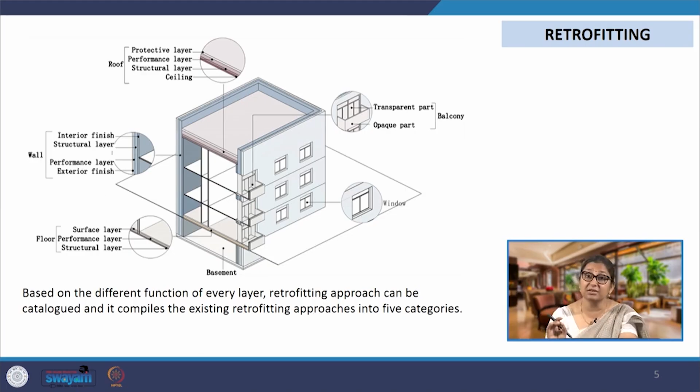Plus we have the MEP - mechanical, electrical and plumbing systems - where a lot of retrofitting measures go. Now, based on the spatial requirement, the services requirement, and the functional requirement, different approaches can be taken. There are 5 different approaches that we would normally see when going ahead with retrofitting.

The first approach is to replace a certain part of the envelope. So we could be replacing an entire wall if it's not performing well or has crumbled for structural reasons or whatever. So we could be replacing an entire building element. That is the first approach, which is replace.

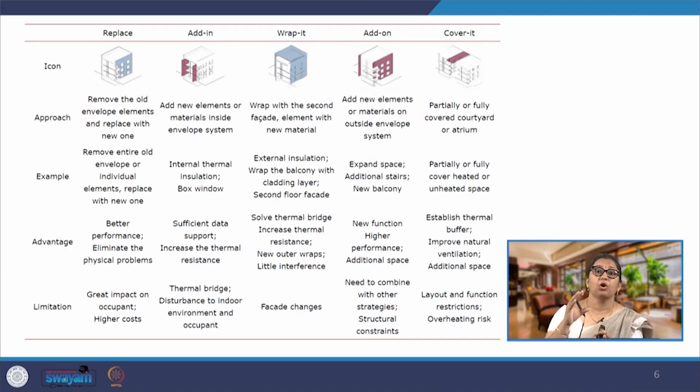All 5 approaches could be used in the same building for retrofitting. It's not that if we've used replacement as a strategy, we cannot also use add-ins, wrap it, add on, or cover it. We can use all 5 of them together on different building components. So this is the first one, which is replace.

The second one is add-in. Here we add new elements or materials inside the envelope system. So the envelope already exists, and we add the new elements and materials inside it.

When we say wrap it, which is the third strategy, we wrap it with a second facade. So the existing building is there, and on top of that we create another facade layer and wrap the entire building in this second layer, which is wrapping.

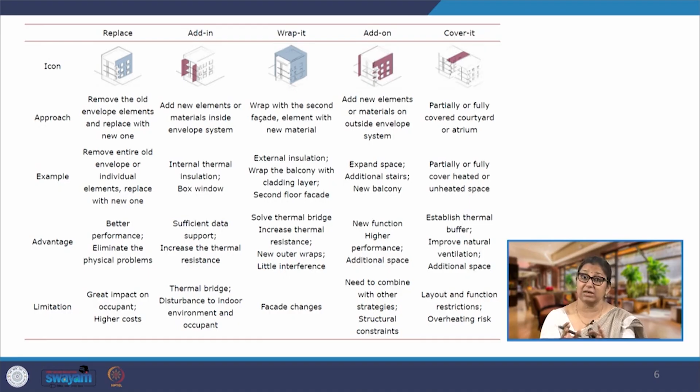The fourth one is add on. We add new elements or materials on the outside of the envelope system. So the envelope existed, and then we add to the same envelope an additional layer, the element or material, but we are not covering all of it. We are not wrapping the entire building, but we are only adding some elements on certain facades or certain building components.

And then cover it, where we partially or fully cover the earlier open or semi-open parts of it. So maybe we are covering the balcony, we are covering the courtyard. So this will be as part of cover it.

Now, all of these strategies, as I said, could be used simultaneously within the same building, but on different components.

Now, looking at an example of each one of these, when we are talking about the replacement of a building element, of the envelope element. So what we could be doing is, for example, there was a brick wall, but now we want to construct some load on it or an extra story on it. So we could be replacing this brick wall with a shear wall, or we could be replacing an entire wall with a glass facade.

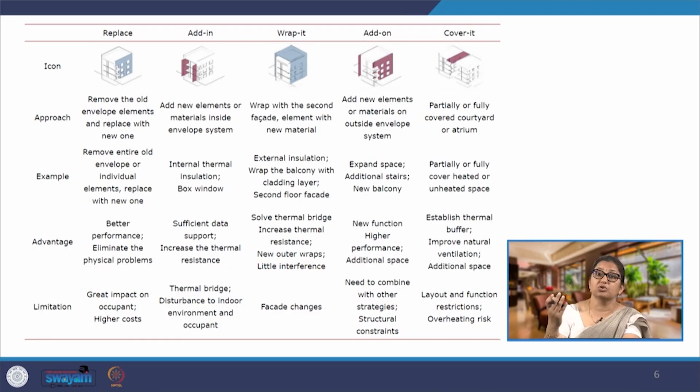Suppose the use of this space is changing, and we are converting an office building into a restaurant or a party hall, a banquet hall. There we might want more of a glazed facade for people to see from outside to inside and vice versa. So we are replacing an entire component - that is replacement.

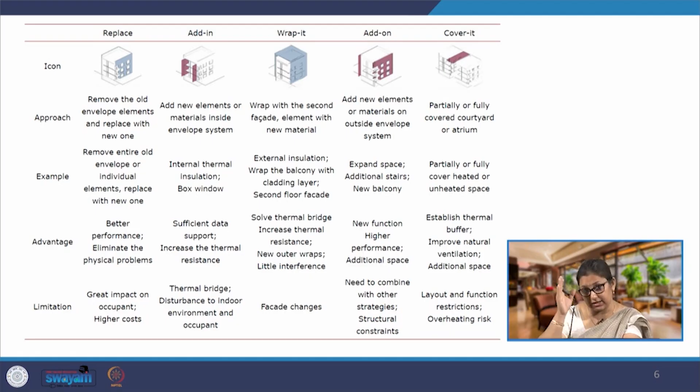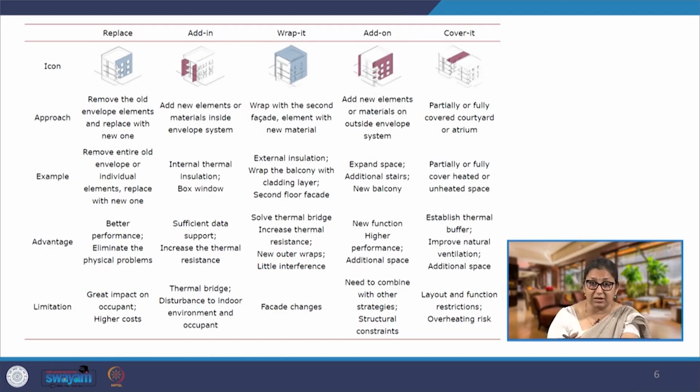Now, add-ins: for example, we can add thermal insulation inside, so this will be an example of add-in. If we are adding the insulation on the outside and an entire layer is being added, that will go in add on. So we are adding on top of it, or we may be adding a complete insulation plus the top layer, the protective layer or the aesthetic layer, the metal cladding. So this will all go as part of add on.

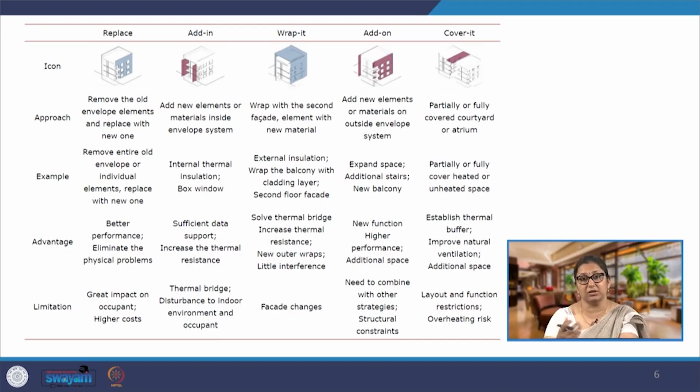When we say wrap it, it could be external insulation, but with the entire building being covered using it, or it could just be, say, a metal sheet which is cut using CNC into beautiful patterns, creating an additional layer of shading, with a gap created in between to be used as a corridor. So this is wrapping the entire building using the second layer.

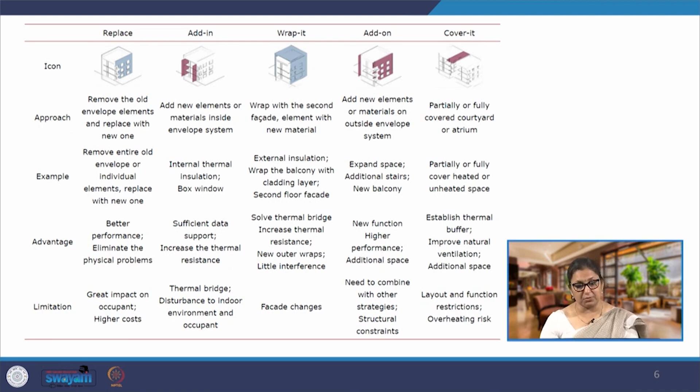And when we say covering, we may be covering these spaces - courtyard or balcony - to heat them or cool them, which was previously unheated or uncooled, non-air conditioned part. So we cover it, and we cover it in a manner that it now becomes integral to the indoors of the building. So these are the different 5 approaches in which we can go ahead with retrofitting.

Now, if you look at some generic examples, we could see the original state of a small space here, and then we added insulation from outside - that is wrap it. Then we replaced the windows for airtightness, and then we upgraded the mechanical systems. So this could be a component by component approach.

We could also be doing this, so here when we said insulation, we changed or added the entire insulation, or when we said windows, we added all the windows simultaneously.

What we could also be doing is facade by facade. So if it is just one facade at a time, maybe we could be changing the glazing on the south facade, or changing the glazing on the north facade and adding shading on the south facade. So we could be doing facade by facade, and then gradually adding the mechanical, the MEP systems.

So, 5 different approaches, and how we go about them in a stepwise manner, that could also vary - it has to vary from project to project. There cannot be any one sacrosanct linear process in which the retrofitting would be done, because each building was serving a different purpose and is now being retrofitted for a different purpose. There could be occupants who are already occupying the building, and it could be that in a phased manner, some part of the building will be retrofitted.

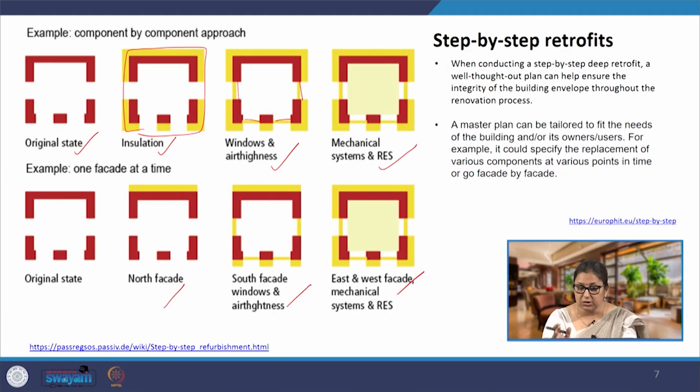Doing the exteriors first and then gradually moving into interiors, that too in a phase-wise manner. So that is what will define what approach we take.

Now, why are we retrofitting? Largely, a lot of retrofits are actually getting done because of energy requirements, to reduce the operational energy requirement. This operational energy reduction gives us a significant reduction in scope 2 emissions. So the moment I say reduction in operational energy requirement, we are directly reducing the scope 2 emissions.

Now there could be a question in your mind, a concern that we are adding extra materials, for example insulation, which will be synthetic. There could be scope 3 emissions coming along with the material, even as we get scope 2 emission reduction. So we are adding scope 3 upstream emissions while reducing scope 2 emissions. How do I balance it out?

Maybe eventually we would be getting higher emissions at the end of the building product's life cycle. So what we have to do is a proper calculation: how much scope 2 emission savings are we getting versus how much addition in scope 3 upstream is being added. If we compare both together and get the life cycle emissions over the entire life cycle of the building, we would be able to make a clear decision on what to use and what not to use.

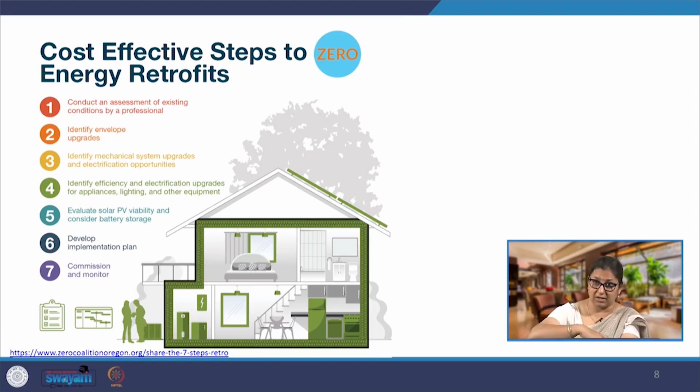When we have all of these together, we develop the implementation plan, because most retrofit projects are ones where either the occupant is going to get the retrofit done while staying, while occupying the building, or the occupant will be moving out for a short time. As soon as the retrofitting work is done, the occupant moves back. Only then does it make sense to retrofit for energy efficiency.

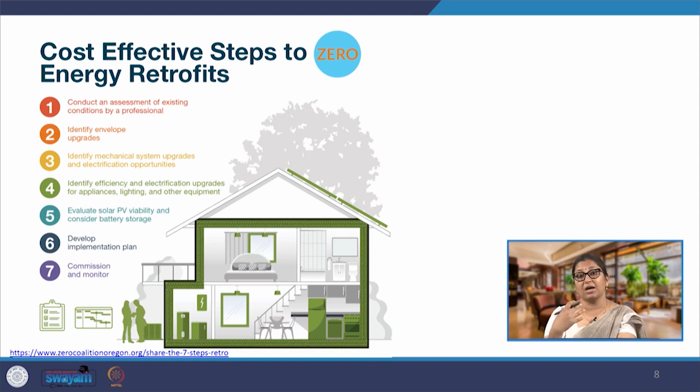So we have to develop a proper implementation plan, how the retrofitting will be done in a phase-wise manner, and finally we have to commission, and monitoring becomes extremely important because a lot of times we design absolutely correctly on paper, but the moment it comes to monitoring and implementation, due to lack of monitoring and commissioning, the systems are installed in a manner that they do not perform as well as the performance which was actually planned and desired. So that performance will not come sometimes.

Now if we look at the retrofitting techniques, there could be two. One, when we say retrofitting, we could be retrofitting the structure. In a lot of cases we would need to retrofit the structure because in retrofitting we are also changing the usage of the space most of the time. So we are retrofitting it to be used as some other type of building, maybe a residential building converted into an office building, or an office building converted into a residential building, or a recreational building. So there could be structural changes also.

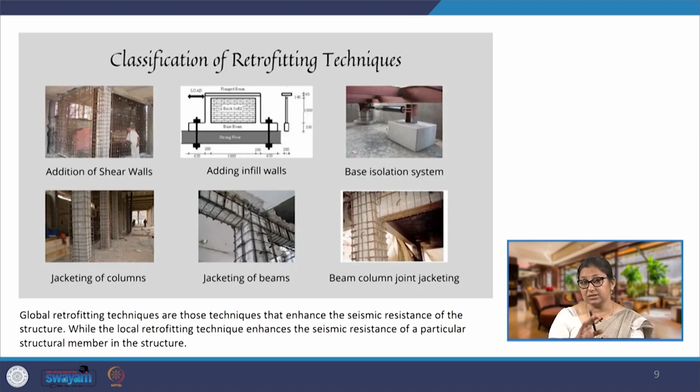So what we would see is solution strategies such as structural jacketing of beams and columns, and the provision of extra reinforcement in the roof. So all these are the structural retrofitting which might be required, not just for energy retrofit but we might be doing this for structural purposes. So maybe we need to add certain extra columns or move certain walls. Additionally, if it was a load bearing wall, we may need to provide an additional structural beam or something like that. So these are the different structural retrofitting requirements which we might be needing.

Now moving on to renovation. When we are looking at renovation, we are looking at three primary objectives. One is to increase the lifespan. Why do I want to renovate? I want to renovate because I want my building to be functional for a longer period. Continuation of this functionality has to be there. So that is the first and primary objective, which is to increase lifespan.

The second one is to reduce the demand for material consumption, and this also includes resources such as energy and water, and then making use of new generation materials - that is, we are looking at circular economy here. So when we say renovation, the primary objective which the client or occupant would have in mind is to add life to this building, so it continues to function for another lifespan.

Additionally, we are looking at making it more and more efficient. As we are going forward, we have higher energy efficiency standards or water efficiency standards, plus we also have the availability of new generation materials and technologies. So we also have to add them into the renovation plan. So these are the three things that we have to do.

Now how do we do that? For increasing lifespans, we are basically trying to increase the intensity of use. So earlier, for example, as I gave you the example, if an office building has to be converted into a residential building - why? Because the office has become redundant. After COVID, after the pandemic, probably the offices are not needed anymore. People are working from home, working remotely. So the office space is now redundant and it can be converted into residential space to increase the intensity of use, which has gone down tremendously for the office building now.

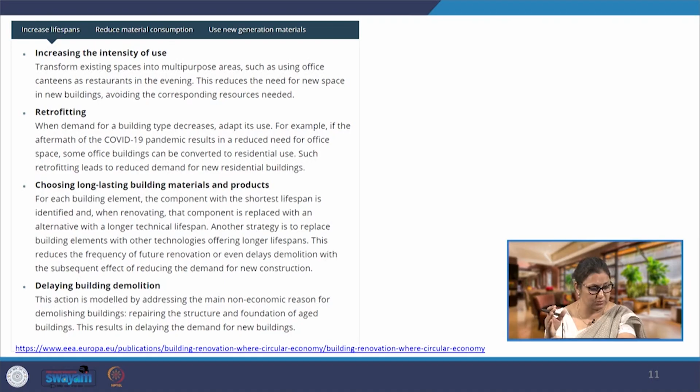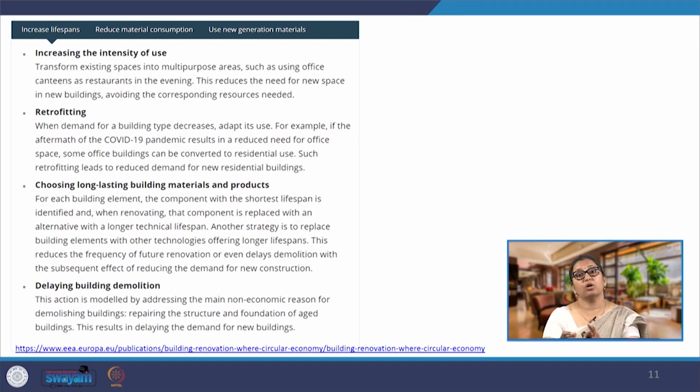So, we are also looking at not just the space change, space retrofitting, but we are looking at materials which have a longer life. So, intensity is also increased and its life simultaneously is also increased, and what we are doing together, through all these measures, is we are delaying the demolition. We do not have to demolish the building. So, making it structurally better, healthier, and also putting it to better use, increased intensity of use.

Now, while doing that, we have to reduce the material consumption. We do not have to add on a lot of material just like a new building. So, how do we do that? We basically use the products which comply with design for disassembly.

So, if you consider a brick wall, now if the brick wall has to be demolished and replaced with another wall, what will happen? A lot of this material, brick, will be broken and will not be put back into use. Some of it will still be, but the mortar, the plaster on top of it will surely not be used back into the process. It can be used for infill, or it can be used as a subgrade or something like that, but it cannot be used back for the same purpose.

However, if we look at design for disassembly principles, the materials which comply with that can be installed, very easily be taken out, and reassembled to some other form. So, these are the materials which we need to check out for and prefer to use. Then we have to maximize the recycled content of the materials which are going to be used for renovation. So, we might be using salvaged materials or products made out of salvaged or recycled materials, but at the same time having a longer life. So, we are looking at multiple factors together.

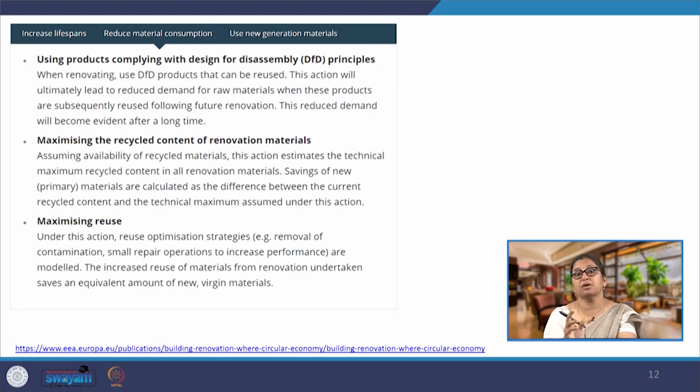And then the last one will be maximizing reuse. We are talking about reuse of the materials. What happens to these materials? So, we have to select them appropriately and then maximize the reuse when refurbishing and when demolishing or taking off certain portions of the building.

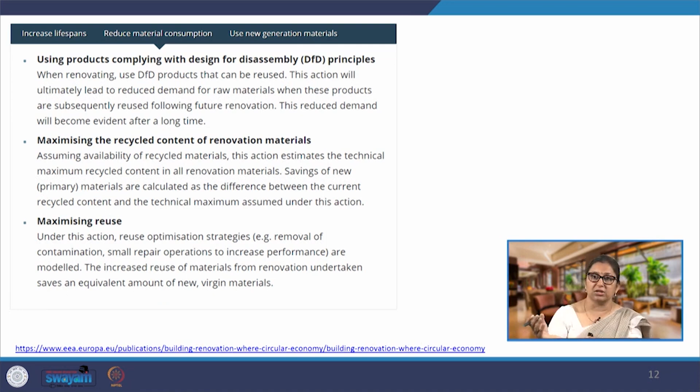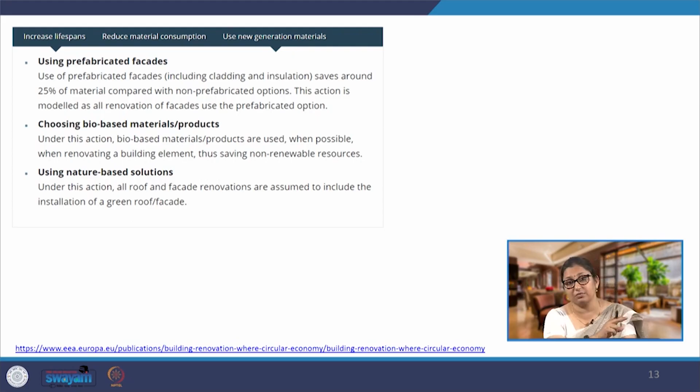And the last one is to use the new generation materials. We could be using prefabricated facades, we could be using bio-based materials or products. So, newer materials are available, nature based solutions could also be there. So, the market is full of these new generation materials. We have to select them on the basis of the factors which we discussed when we were discussing materials. So, we have to know what the requirement is and then select the material appropriately.

So, we are basically looking at all these strategies somewhere or the other, but the best is to retain. If we retain a large part of the structure of the building, we are looking at tremendous savings in terms of embodied energy. But if we have to go further, we will look at some of these strategies. They could be in a stepwise manner or depending upon the purpose, but they will still be less than if we completely demolish, dispose of the waste, procure new materials and construct the building absolutely new. But if we know that this is how it helps the environment and economy and everything, then why are things not happening?

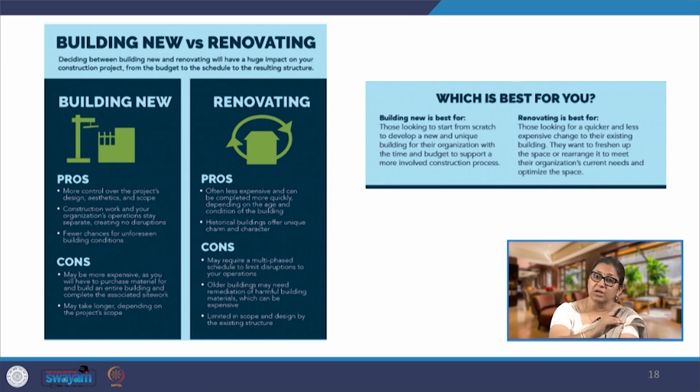The other thing is that if we are renovating and retrofitting some very old historical building, it will add the charm which the new building can never have. So, if you go to a lot of old cities, historic cities, you would find that the majority of the old buildings have been retained and they have been refurbished and retrofitted. So, retrofitting and refurbishment is very common for buildings or cities where more historic buildings are there, which can never come with a new building. So, with these pros and cons, we have to decide what would be the best strategy for us.

If we overall look at the carbon dioxide emissions which are associated, we clearly can calculate based upon the material that is going to be put in. For a new building, how much material is going to be put in, and then we already know the emission intensity, we already know the carbon footprint of each material, we have databases, and then we can compare it with the refurbishment.

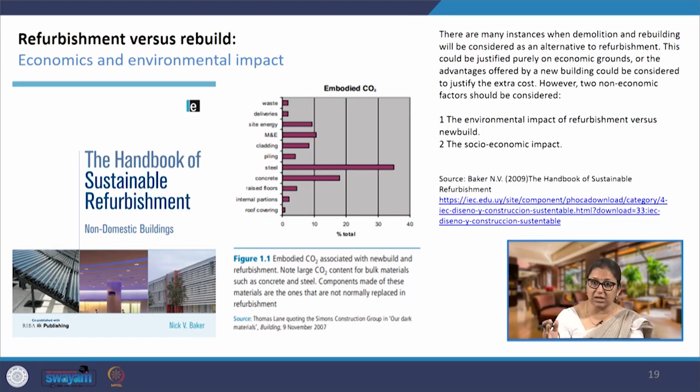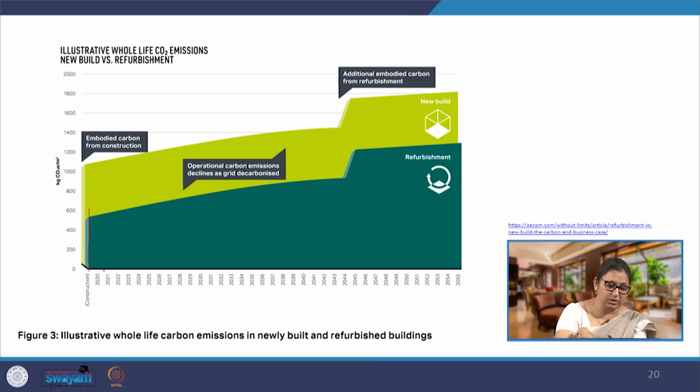So, there are going to be multiple times the emissions that are going to accrue from the new buildings, and this is over the life cycle of the carbon emissions for newly built and refurbished buildings. So, we will see that the refurbished buildings will be significantly lower throughout their life cycle than the new building. So, we will be adding some amount of embodied carbon from refurbishment, but if we are completely constructing, this entire initial block of embodied carbon will be added to the new building.

Now, if we are looking at any refurbishment project or any building project for that matter, every building as a product will have some limited life, but not all the systems within the building will have the same lifespan. So, we have to clearly know what these different layers are and how much lifespan they have. So, for example, the stuff which is there, the furniture, the furbishment, curtains, wallpapers and all these, it is difficult to predict what life it has. It depends upon the client, who could be changing them frequently or may not change them. So, it is difficult to predict, but if we look at the space plan, it has a lifespan of 3 to 30 years depending upon the building type.

So, even the spatial planning will have a certain life, it changes; even within a residence the spatial planning will change. Then come the services, which have a lifespan of 7 to 15 years, less than the spatial planning. Then we have the outer skin, which has a lifespan of around 20 years. We have the structure, which has the maximum lifespan compared to all these, approximately 60 years. We could be taking it higher, up to 100 or 120 years, depending upon what materials we are using.

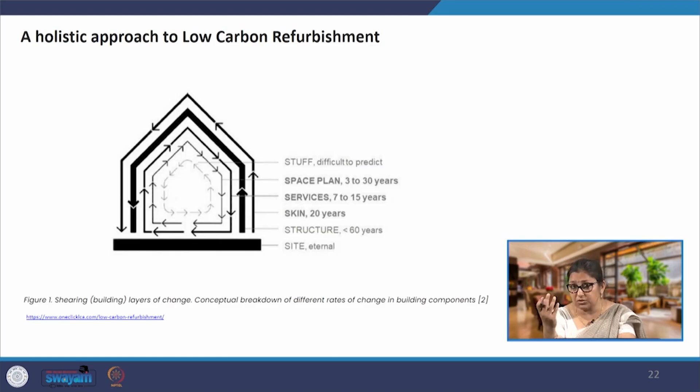Now, why we are looking at this is, we look at the materials that are going to be used for each one of these. So, if we are talking about services, we know what materials are going into services. We can't plan services for eternity. This building is not going to be there. The services are going to be replaced much sooner than the life of the building. So, what kind of materials should we select for services, or what kind of materials should we select for structure or for skin? This is what we have to know and we have to clearly understand.

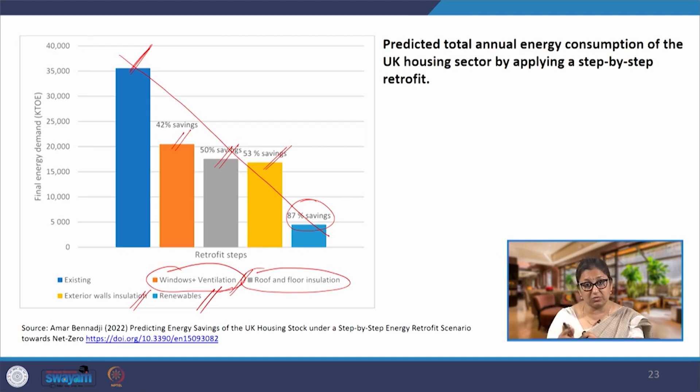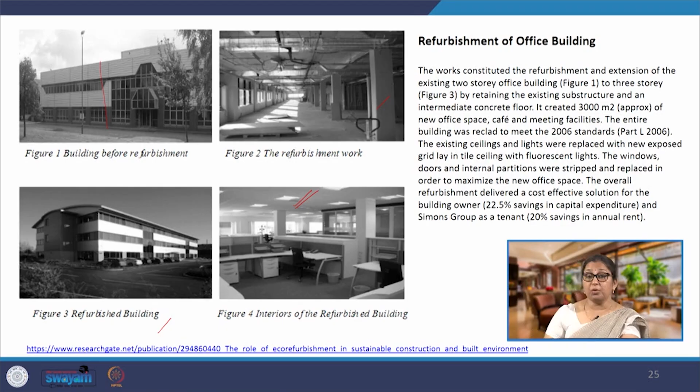So, I hope with this you have understood the idea behind refurbishment and retrofitting for the existing buildings. The principles remain the same. The passive design principles, the factors affecting material selection and the emissions associated with materials, all these principles remain the same, but instead of applying them to a new building, we are applying them for retrofitting and refurbishment. I will stop here and we will look at some of the case studies for new projects, not refurbished projects, to understand the whole idea of scope 1 and 2 emission reduction through building design and construction in the last lecture of this week.